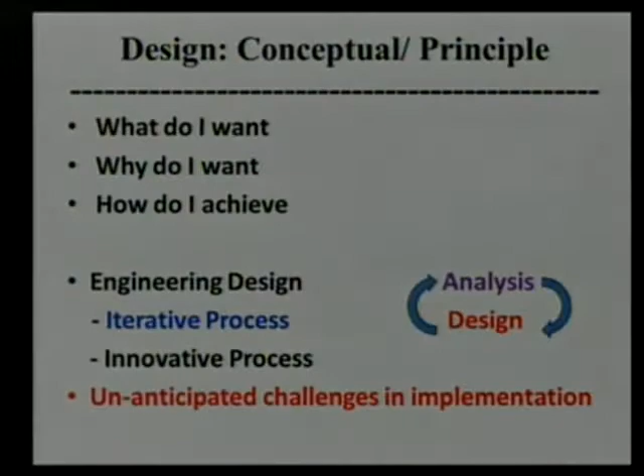Now when I put it as engineering design - I am in the aerospace engineering department, and I'll say we teach analysis, but can we teach design? Because design is a very iterative process and it involves a lot of innovation.

As part of this project, what I found were several unanticipated challenges when we tried to implement certain things. This is the learning and the experience which we pass on to the next generation or the next student.

The first time you do something, there are a lot of challenges, and I'll briefly give you a few which we faced, for want of time. Of course, we teach analysis - analysis is mathematics, physics, chemistry, and today biology is also coming into the engineering field, because of understanding how biological systems work in terms of autonomy or intelligence, and how you put that into your engineering vehicles.

The design goal is achieving an end product - that's how I put it. It involves material, then manufacturing, then assembly, then of course testing, then finally operation and maintenance, and the environment where I operate. So all these aspects come into the design goal, which I may not know right at the beginning of the project.

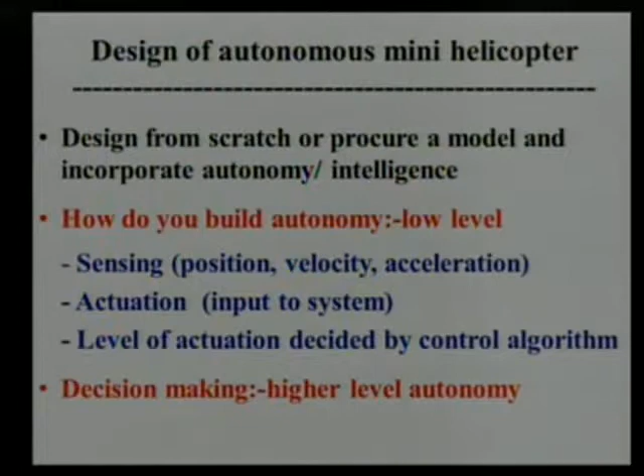So when we started, do we start from scratch in designing the entire vehicle, or procure a vehicle and incorporate autonomy or intelligence? Now the very word autonomy, intelligence itself is kind of defined, redefined, and I would say, okay, first very low level autonomy.

That is, I need to have sensing. Sensing means position, velocity, acceleration, which I mentioned, both in terms of translation as well as rotation. Then you can go to a higher level, some chemical sensing or nuclear radiation sensing. So there are various types of sensors which we need to have.

Then of course there's the actuation, which is the input to the system. The last part is the level of actuation which I have to do so that the vehicle or whatever can do the job which I want it to do. This is where the control algorithm comes into the picture.

And of course, the last one I put as decision making - that is a higher level of autonomy. Decision making, I mean, suppose if you have an obstruction, how do I go around that, and various other levels of decision making which can come up. But right now we are at the low level of autonomy.

I have classified my challenges because this involved a large gamut of subjects, right from vehicle dynamics, power plant, transmission, controls, communication, and then ground station, display, everything. So I classified them under three major topics: one related to electronics, one related to mechanical, and the other related to control.

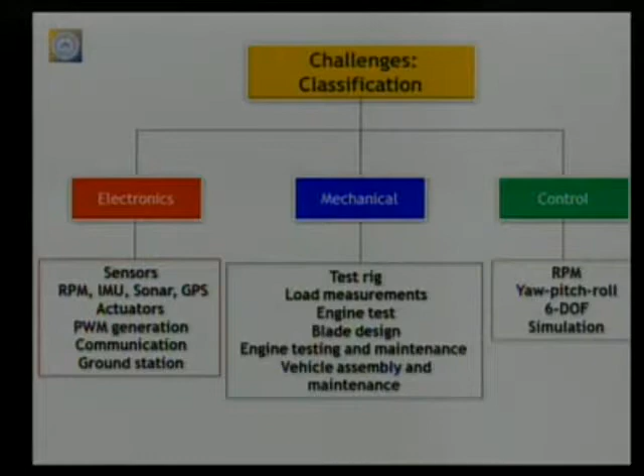I'll mention a few of the challenges and problems we faced everywhere, even though it's a procured system: mechanical system failure, electromagnetic radiation, where a sensor performs fine outside but doesn't perform in some environments. I've put several things here. Of course, manpower is another key challenge, in training the manpower and in retaining them.

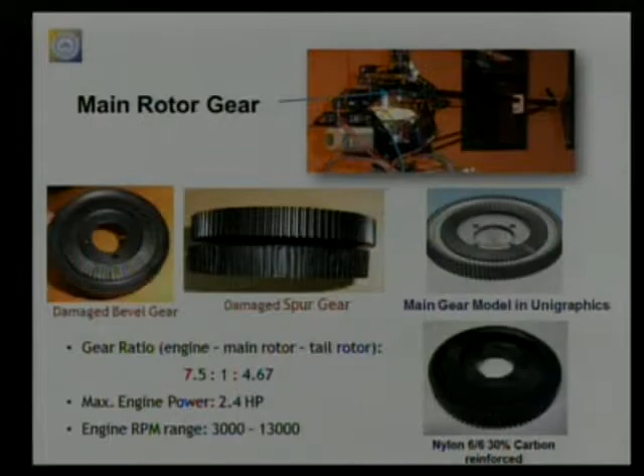One of the problems we faced was the gear, which was failing. One option was to keep procuring the gear, but I thought it's a good design problem to give to the student. So the specifications we gave were the gear ratio, the engine power, and the engine RPM range, and it should be less weight than what was already there, around 72 grams or so. So we went ahead.

How did we design it? First we did the analysis, the strength calculation, and determined the operating condition. Given the dimension and operating condition, we did all the calculations, then material selection. First we had to know the availability of the material and the weight, then testing, then manufacture, all these things.

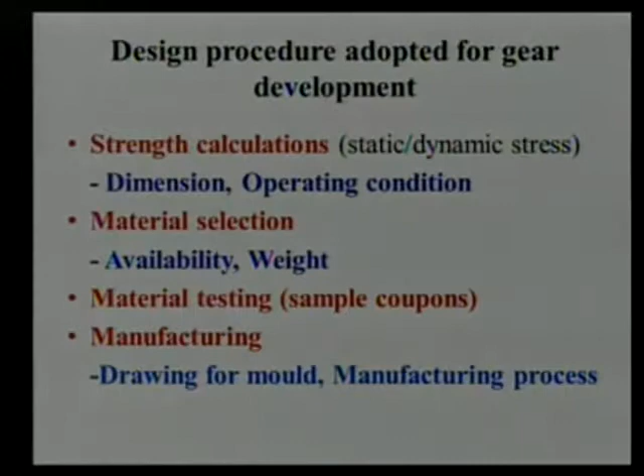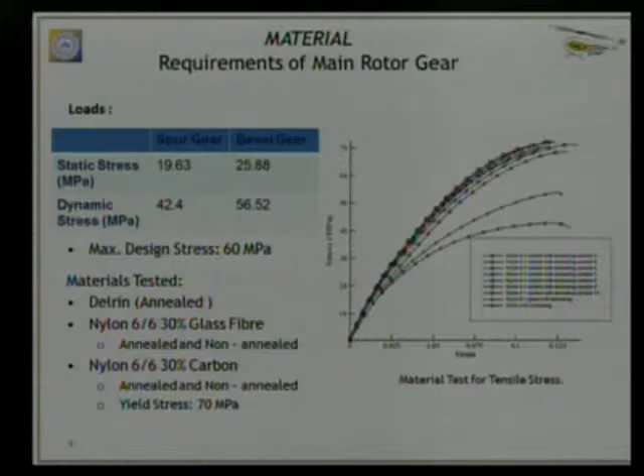Finally, I'll just show a few pictures. We did the material testing ourselves in our lab. We had to procure the material and get the repeatability of the material characteristics.

For manufacturing, I can do rapid prototyping very quickly to make the gear, but the only problem is it cannot take the weight, the strength - it just broke in one run. So the final design we made was out of nylon 6/6, and it worked for 3 years without a failure.

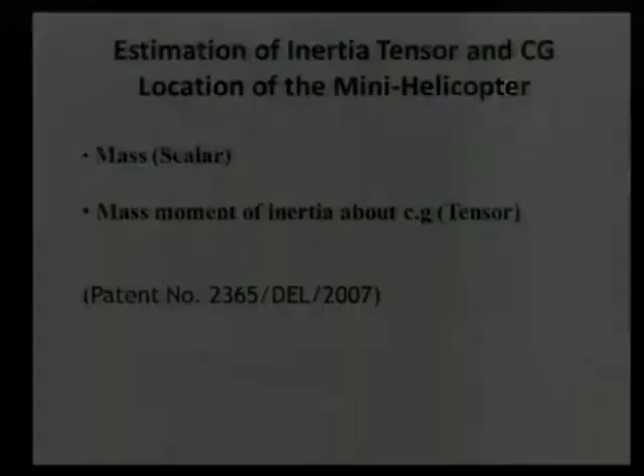Moving to the next point - one of the innovations we had was, normally for vehicle control system design, we need to know the mass and mass moment of inertia, whether we can actually evaluate it by experiment. So we designed a test rig, and went through a complete mathematical approach using tensor and vibration analysis. We were able to get all these properties, and people liked this procedure.

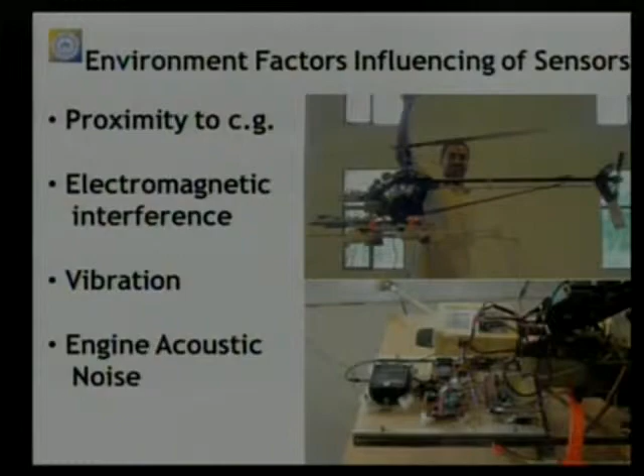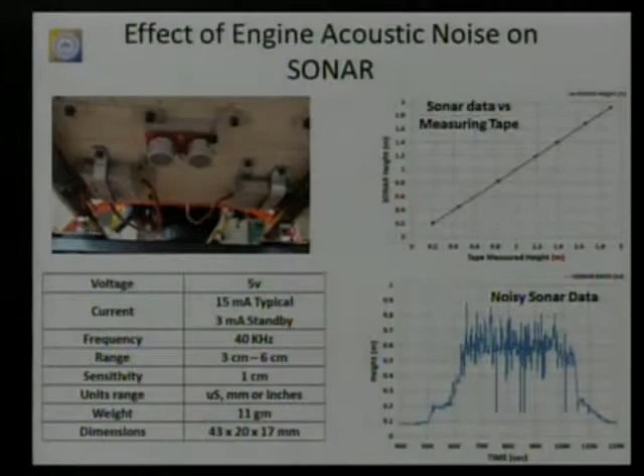When I mention the environment in which we operate, this is very critical for any design - electromagnetic interference, vibration, engine acoustics. I'll show one example: a sonar that performs beautifully in a non-vibrating environment. I measure the height and get the sonar output - a nice curve. But the moment I put it on the vehicle, no matter what height I go, the engine noise it picks up makes the signal useless.

So I need to find a sensor which can give me good height estimation. This is still one of the major challenges we face. Finally, this is the last point I'll show - we have demonstrated limited success in the control of the vehicle, and control of the vehicle, I faced a lot of challenges.

One thing I want to mention - this morning, I think one of the speakers said something about learning, not teaching, which was very interesting. Learned, not taught - a kid learns bicycle. No, he said 'learned and not taught', something like that, right? I think Professor Ramani said 'learned'. See, it is very simple.

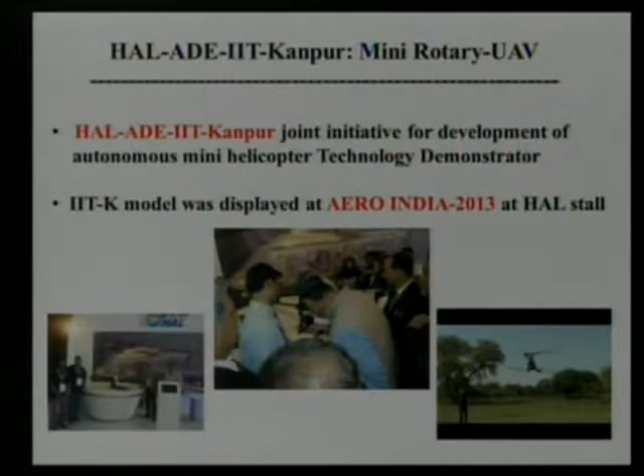The control - how I figured it out was it was very difficult to control because it's an unstable vehicle. When we balance a stick, what do we do? We just do it, and a kid also learns that immediately - there is no mathematical algorithm. But the question is, how do I transform this into an algorithm so that I can do the control?

Then I found some feeling I was getting - I look at it, I feel it in my hand, I stabilize it, and I tell the kid, this is what you have to do - you learn it. We incorporated that, and the vehicle became stable. So that was one of the very challenging tasks we faced, but this was not through any textbook learning.

We recently displayed this in 2013 at the Aero India event in the HAL stall, because now HAL, ADE, and IIT Kanpur have a joint initiative to make this vehicle a technology demonstrator for India. Thank you.